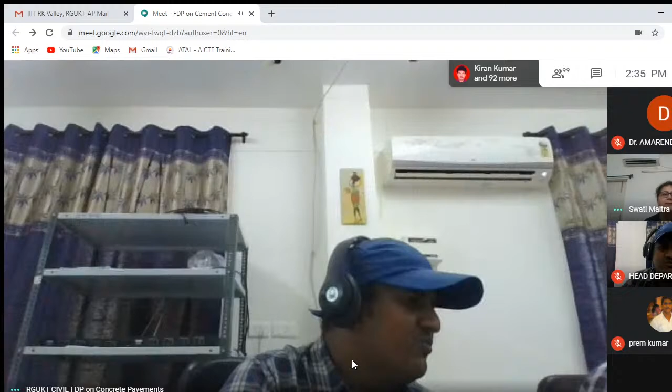Let me introduce Dr. Swati Maitra. She is an assistant professor in Ranbir and Chitragupta School of Infrastructure Design and Management, IIT Kharagpur. She obtained her PhD in civil engineering from IIT Kharagpur and masters from IIT Bombay. She worked in industry for about 8 years. Her research areas include concrete pavement analysis, design, performance evaluation, concrete overlays or white topping, sustainable concrete and cementitious materials, retrofitting, and rehabilitation of civil infrastructure. Dr. Maitra has several research publications in book chapters, international and national journals and conferences. She has received several awards like DAAD Fellowship by the German Academic Exchange Services, Bihar PWD Medal by the Indian Roads Congress, and others. Dr. Maitra is actively involved in a number of research and industrial projects. With that, I request Dr. Maitra to carry forward the session.

Thank you very much. Thank you, everybody. First of all, shall I start, Dr. Amarendra? Yes, madam. Okay. First of all, I would like to thank the organizers, Dr. Amarendra and others, other faculty members who are here for inviting me for this faculty development program of this institute. I am really thankful to them, and it's my pleasure also to interact with them and other participants. So from my behalf, I welcome all the participants for this session. You have come from different institutes, different backgrounds. So after the lecture, just feel free to discuss also. So I will now start my presentation.

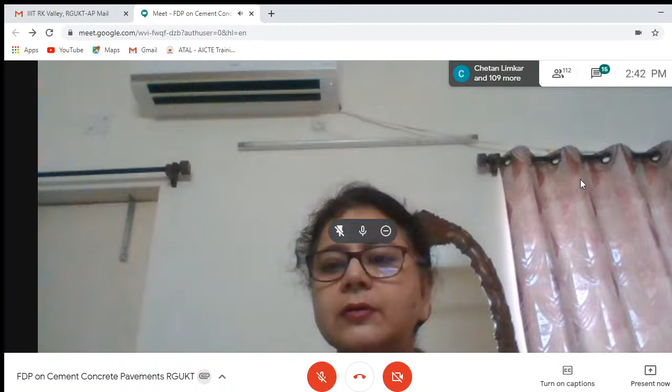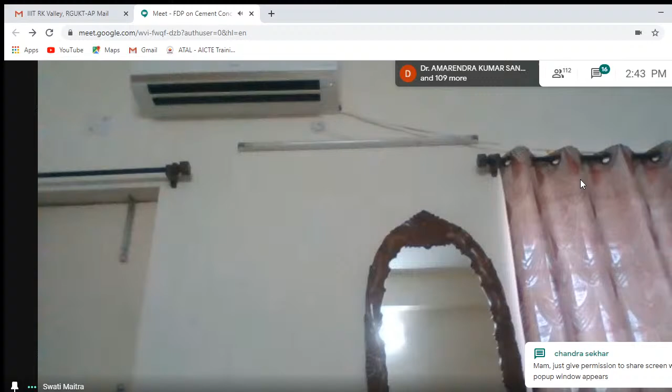It's not showing, I don't... just one more. Just a moment. Just a moment. Present now, your entire screen. Select, okay, share. Share, now off it. Is it coming? Yes, madam. Coming? Yes, madam. Go to the presentation. Okay, slide show, more, go to slides. Okay, so it is visible now? Yes, madam. Fine, okay, fine. Right, okay.

Sorry for the delay. So today's topic is characteristics and design of rigid pavement. Though I will mainly focus on the characteristics of rigid pavement, and this is just an introduction. Road infrastructure: the main component of any road infrastructure is the pavement, and we have bituminous roads and concrete roads. I think this FDP is only on concrete roads, so I'm not going into detail. We can compare construction cost, maintenance cost, durability, and life cycle cost. So in recent years, there is significant emphasis from the government for the construction of concrete roads in India.

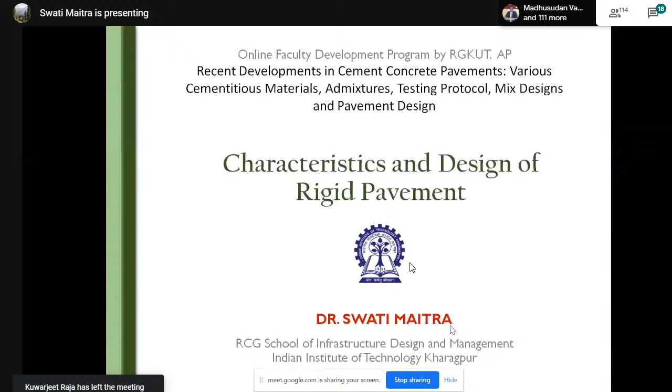In jointed reinforced concrete pavement, it has reinforcement. Continuously reinforced concrete pavement is another type of concrete pavement where we have continuous, a good amount of reinforcement throughout the concrete slab. Pre-stressed and precast is another type of concrete pavement where you can build the concrete slab in a factory and place it on the site. It could be pre-stressed so that it can take more load, and the thickness requirement is also less.

Roller compacted concrete pavement is also another type of concrete pavement. Cell-filled concrete pavement is normally for low volume roads, village roads, like that. Pervious concrete pavement is also another type of pavement, comparatively new. Concrete is generally impervious in nature, but this type of pavement, from the name you can understand, can permit water. So for low volume roads or urban areas, this type of concrete pavement can be used.

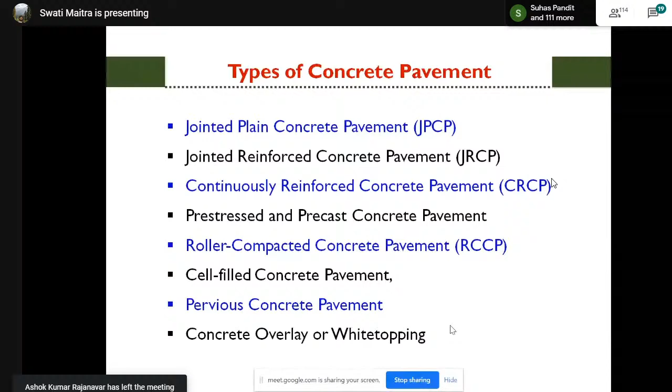And another is the concrete overlay or white topping. This is also coming in a big way nowadays, and this is mainly a rehabilitation measure for existing bituminous roads. So there could be several types of concrete pavement, but the most common type is the jointed plain concrete pavement, and in most of our highways we have this. Our main focus of today's presentation is on jointed plain concrete pavement.

Now let us talk about the characteristics of concrete pavement. Concrete pavement is composed mainly of the concrete slab, and this concrete slab has high flexural strength. Concrete is generally a material which can take up very high compressive strength, and of course its tensile strength and flexural strength are comparatively low, but the strength of the concrete slab governs the concrete pavement design mainly.

So it has concrete slab at the top surface, and below it is the foundation, composed of the base layers, sub-base layers, and the compacted subgrade. In concrete pavement, the influence of subgrade is comparatively less as compared to a bituminous pavement. In case of bituminous pavement, it is actually a layered structure, and all the layers are responsible for taking up the load, so stiffness also decreases as we go downwards.

In case of concrete pavement, also we have different layers. Is that any problem, Dr. Amarendra? No, madam, no, madam, please continue. Okay, you can tell the participants to mute so that there will... Madam, but one or two. Yeah, okay, it's okay, no problem.

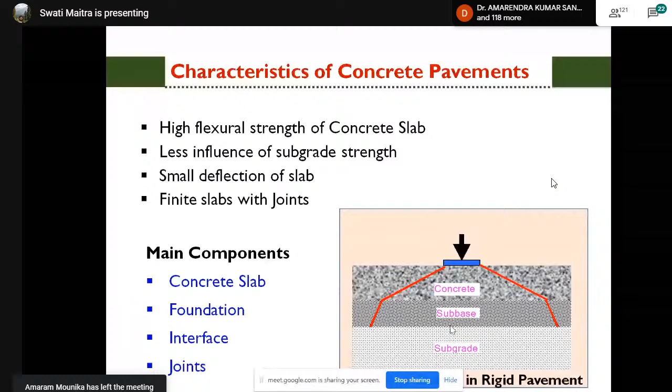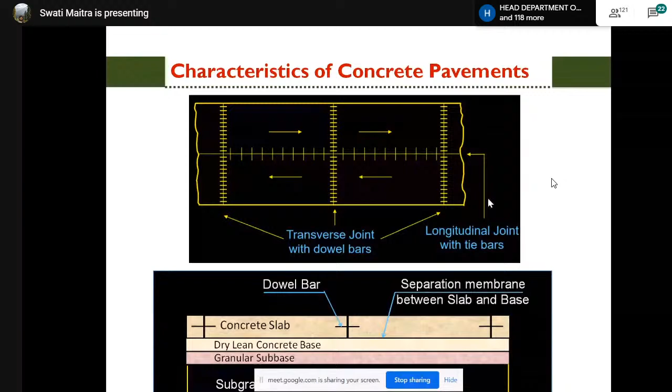This is just a schematic diagram of the concrete pavement. The first picture is the top view, and these lines are the joints, along the transverse direction and along the longitudinal direction. The arrows show the traffic movement. Along the traffic movement you will find these are the joints: transverse joints, provided with dowel bars, and longitudinal joints, provided with tie bars. We will discuss these things. This is just a sectional view of the pavement.

The concrete slab, the dry lean concrete base, the subbase, and the subgrade.

The structural behavior of concrete pavement depends on the traffic characteristics and also on the climatic characteristics. The main load coming on the pavement is due to traffic movement, for all types of pavement. So traffic characteristics is an important consideration for the design of the pavement. This means not only the load, but the tire pressure, the wheel position, the wheel distribution, whether it is single axle or tandem axle, and the tire pressure or total load coming on the pavement. All of this matters in developing the stresses. So the traffic load or axle load is the main load coming on the pavement.

Another important factor is temperature variation. Climatic characteristics mainly arise due to temperature variation and moisture variation. The temperature variation could be daily variation and seasonal variation, each having its own effect on the development of stress on the pavement. Moisture variation is also there, but its effect is much less compared to temperature variation. So often in analysis or design we neglect the effect of moisture, but it has a similar type of effect as temperature.

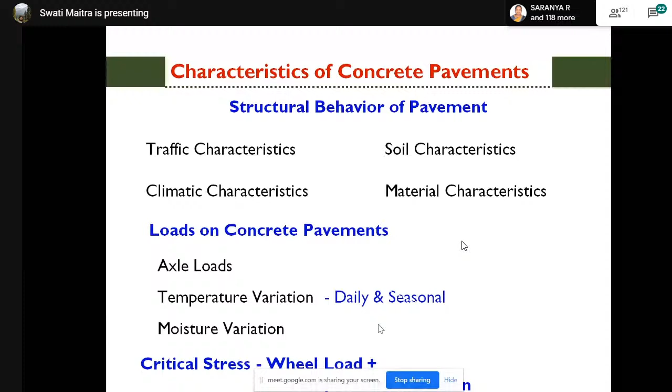Jointed plain concrete pavement: the concrete slab is the main structural component. It is plain cement concrete without any reinforcement, and it is responsible for the load carrying of the pavement. The foundation is a combination of subgrade, base, and subbase, and the foundation is assumed as a Winkler foundation. For all our analysis and calculations, the Winkler foundation model has been assumed, a very simplistic model, as suggested by Westergaard, who is considered the father of concrete pavement analysis, and from that we still use Winkler foundation.

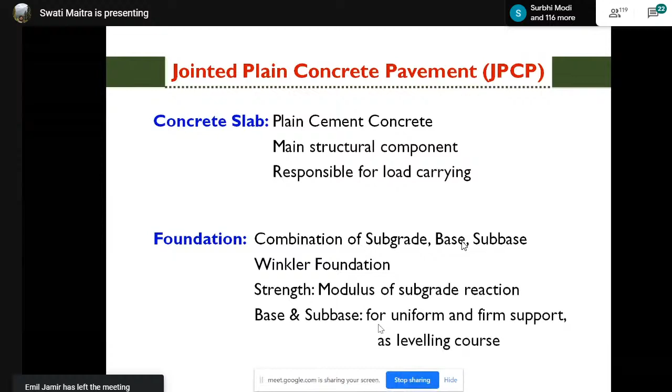Of course, in some analyses, elastic foundation can also be used, but Winkler foundation model is still quite popular. In Winkler foundation, the subgrade strength is expressed by one single parameter called the modulus of subgrade reaction, and this parameter can be found from a plate load test, or it can be correlated from the CBR value. Base and subbase, as I said, provide uniform and firm support for the concrete slab.

Now the interface, as I said, could be a bonded interface or an unbonded interface. A bonded interface means when the concrete slab at the top is cast directly over the base or subbase, then we call it a bonded interface.

The interface between these two layers is very rough, and the friction between them is very high. This is because the lower layer is, in most cases, dry lean concrete, and even if it is WMM, the friction is still quite high when the concrete slab is cast directly over the base.

In case of an unbonded interface, there is a bond breaker between the concrete slab and the dry lean concrete base. This bond breaker could be a thin asphalt layer, a polythene sheet, or some other polymer material. Generally in India, we use a very fine 125 micron polythene sheet as a bond breaker.

This interface can also be called a smooth interface. The bonded interface can be termed a rough interface, whereas the unbonded interface can be termed a smooth interface because it has very low friction.

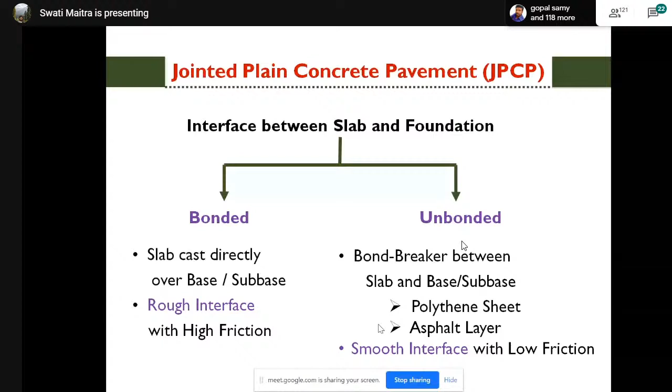Now, joints are an integral part of the pavement, as I said. Earlier, sir also discussed the different types of joints and why they are provided. We will discuss this a little bit here as well.

In JPCP, we have four types of joints: contraction, construction, expansion, and isolation joints. These joints are provided to control cracking due to shrinkage, thermal contraction, or moisture and thermal variation within the slab. Joints are provided in both the transverse and longitudinal directions of the pavement.

Concrete is a material whose main ingredients are cement, aggregate, sand, and water. When water is added to the dry mix, hydration of the cement takes place. This cement hydration is an exothermic reaction, so a lot of heat is generated.

If we cannot control this heat, there will be loss of water through evaporation, and because of that, hydration cannot take place properly. If we control this evaporation of water, hydration can take place in a proper way, or sometimes we put additional water so that it gets sufficient water to hydrate. That is why curing is necessary in all concrete structures.

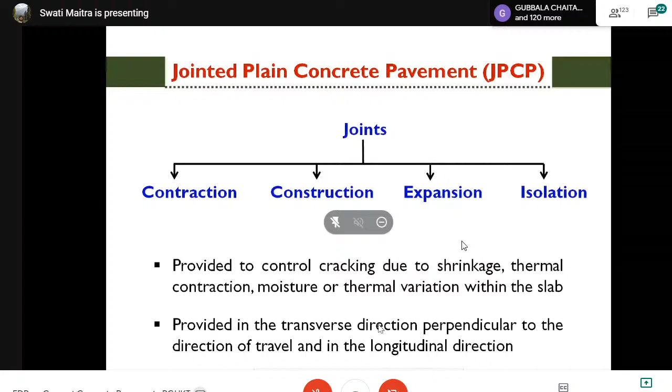So we have contraction joints, which allow cracks due to thermal contraction. We also have construction joints, to separate successive construction activities. These construction joints occur, for example, when we are constructing the pavement and after some time have to stop the work.

Say a day's work is over, so we have to stop it. There we need to provide a full depth construction joint. So that is necessary, and we have to provide dowel bars there.

Construction joints are provided to separate the successive construction activities, and expansion joints are provided to permit the thermal expansion of the slab without damaging the adjacent slabs or structure. Expansion joints are not provided in India in concrete pavement, but they are provided near the structures.

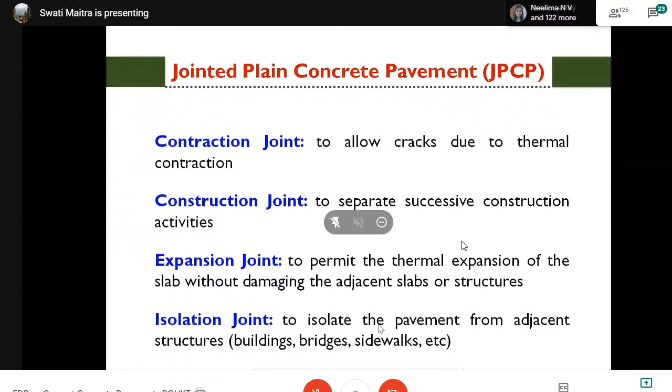So that needs to be provided. Isolation joints or expansion joints are provided only adjacent to the structures, but contraction joints and construction joints have to be provided. These expansion or isolation joints need to be provided when there is an adjacent structure, so you have to provide these two types of joints.

I think similar pictures sir has also shown in the morning, but this is just a schematic diagram. So I'm again showing quickly.

This is what we do here. This is the undoweled slab. We are saw cutting it at 1/3 to 1/4 of its depth, so that the crack occurs below that saw cut. Since those are the weakest locations, we provide dowel bars at that location. So that is the contraction joint in pavement.

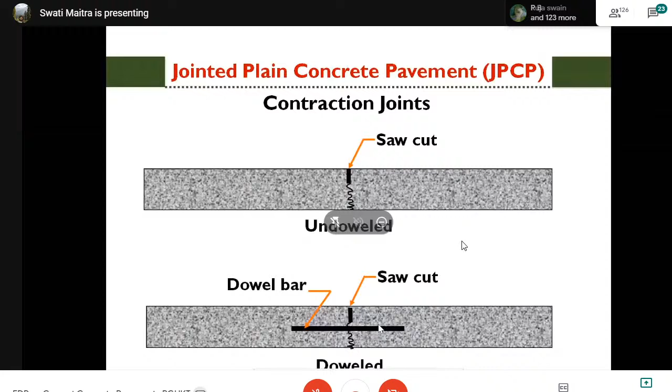In case of longitudinal joint, similar thing. Here also we cut it along the length of the pavement, same 1/3 to 1/4 of the slab depth, and we provide tie bars.

Of course, the diameter of the tie bars are much less as compared to dowel bars, because the function of the two bars are different. Dowel bars are provided to transfer the load from one slab to the other slab. However, the function of the tie bar is not that. Tie bars are provided to hold the two slabs in their positions, not for load transferring.

Tie bars are provided. So here you can see the schematic diagram of the tie bar at the longitudinal joint of the pavement.

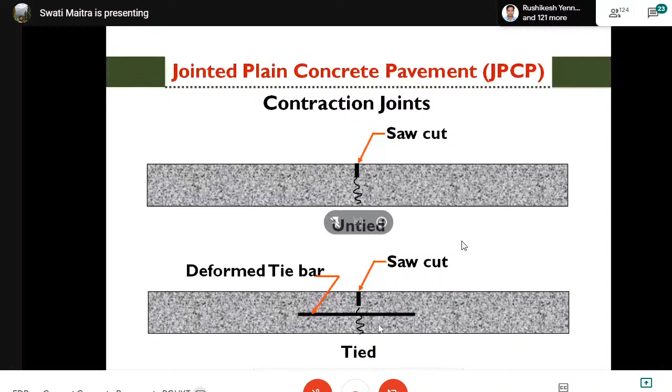Here, after the pavement is constructed, the grooves are cut, and this has to be cut within 18 to 24 hours of the pavement. Otherwise, again, shrinkage cracks may occur. So this is also a very important thing, that we have to cut the grooves with proper depth and also within a stipulated time, that means within 24 hours.

In many cases it has been found that because of the late saw cutting, cracks have occurred on the pavement, and there are other distresses followed by that. We have seen also in NH 60 that after the groove cutting, when we open that side of the pavement, or removed the shoulder portion, cracks have been found below the saw cut. So this is good.

Otherwise, cracks may occur at any other location. We want the cracks to occur only at the saw cut locations. So this is the contraction joint created below the saw cut of the pavement.

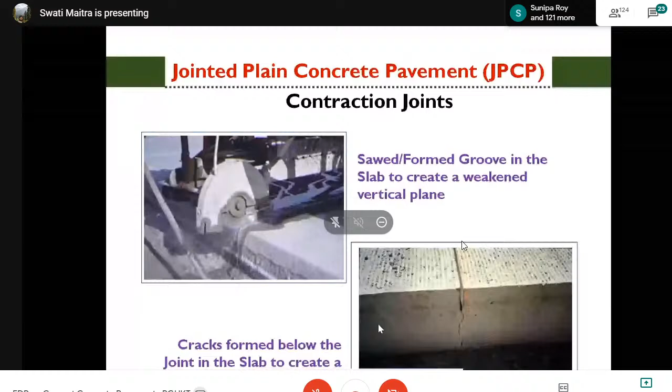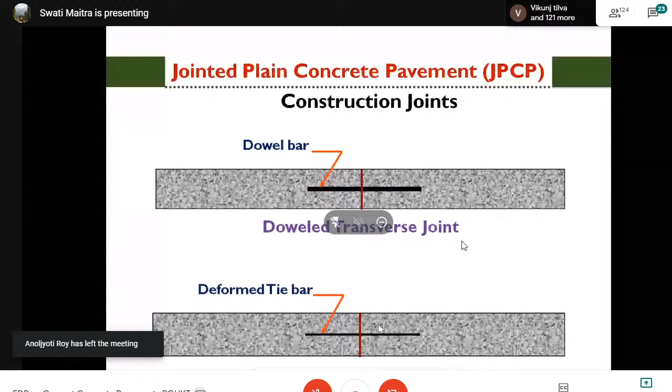For longitudinal case, we need to provide tie bars as well in the construction joint. Longitudinal construction joint, tie bars will be provided to hold the slabs in their position.

Generally, dowel bars are of the range of 32 to 36 millimeter diameter, and the diameter of tie bar is 12 millimeter, 16 millimeter, like that. So there is a lot of difference in their diameter based on their purpose. Dowel bars are for load transfer, while tie bars are just to hold the slabs.

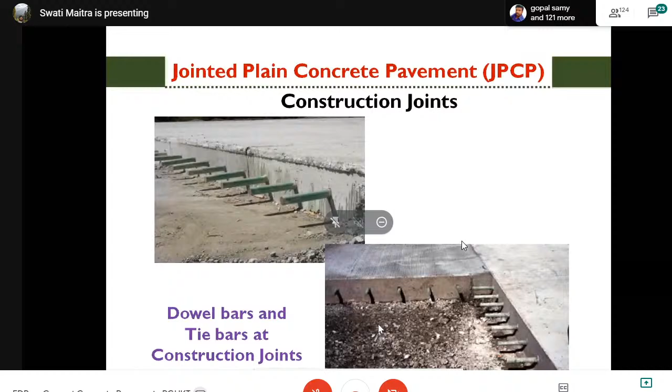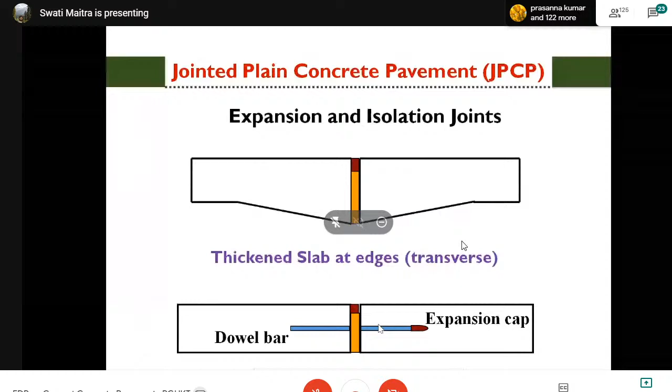Now, as I said, load transfer is a very important component in jointed plain concrete pavement, because it is not a continuous structure. The slabs are formed because of these joints in the transverse and longitudinal directions. So load has to transfer from one slab to the other, and how well the load is transferred actually governs the performance of the pavement. It is very important that the load applied on the slab is shared by the adjacent slab, and this gives the performance of the pavement.

If the load transfer is poor, then a lot of distresses may happen: faulting type of distress, pumping, erosion, corner breaks. I will show you some pictures of several distresses that occur if the joint is not properly constructed, or not properly sealed, or the load transfer is not proper. There could be many reasons for distresses, so I'm not covering those, but I will show some pictures of how joint-related distresses occur in JPCP.

And the performance of the pavement is expressed by a factor or parameter called load transfer efficiency. The load transfer efficiency is the ability of the pavement slab to transfer the load from one slab to its adjacent slab. This load transfer is done mainly by two mechanisms: one is the dowel bar system, another is the aggregate interlocking system. In some cases, it is a combination of the two.

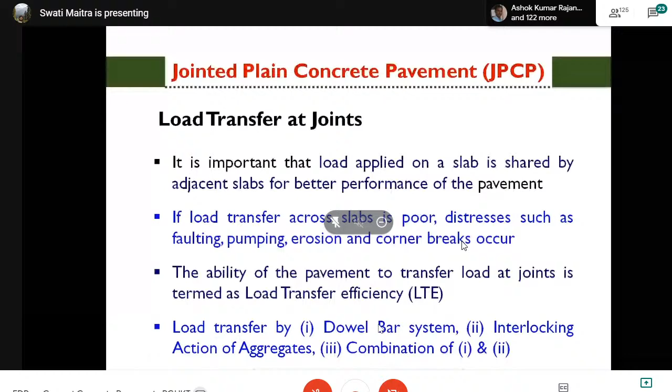Now, load transfer is very important to transfer the applied load from one panel to the other panel. This load transfer is expressed in percentage and can be measured by measuring the deflection of the loaded slab and the deflection of the unloaded slab. So the load transfer efficiency is actually the ratio of the deflection of the unloaded slab to the deflection of the loaded slab, expressed in percentage.

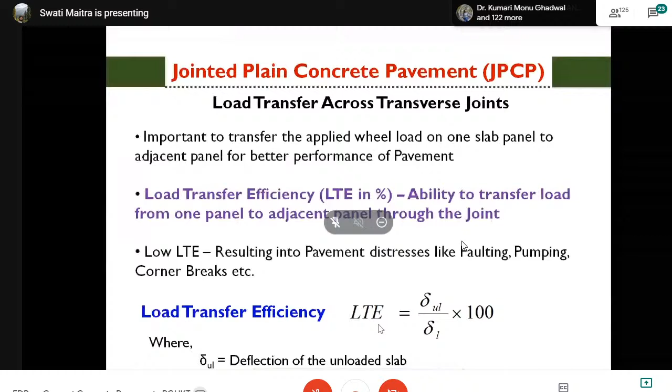So from this expression, you can understand that if the unloaded slab deflects equally with the loaded slab, then the load transfer efficiency is 100%, which is the ideal case. But it is an ideal, theoretical case, it cannot happen. When the unloaded slab deflects very near to the loaded slab, the load transfer efficiency becomes high. So it is the purpose of the designer or construction people that the load transfer efficiency should be very high, because that governs the performance of the pavement.

And then this was repaired, retrofitted, strengthened, and this you cannot see now because it was completely replaced. This happened, of course, due to improper settlement of foundation, possibly, and maybe some other distresses. So there will be a lot of gaps and difference in levels also in the two portions of this.

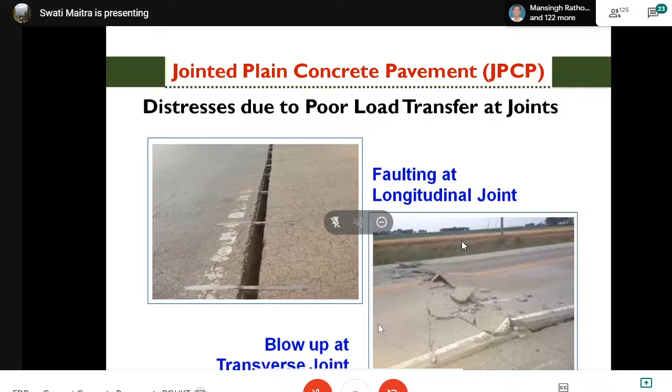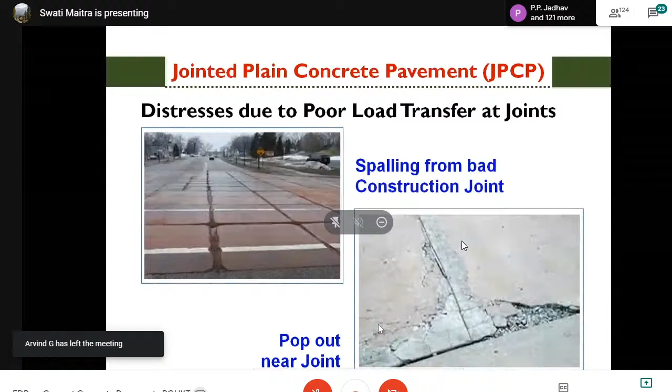So these are all joint related distresses that occur in jointed plain concrete pavement if the joints are not properly constructed, treated and maintained. Joints, particularly in JPCP, need to be sealed so that water and other materials and dust particles should not go inside and damage the underlying layers. If that happens, it may damage the subgrade, cause erosion, cause voids below the slab, or damage the base and sub-base layers.

So it is very important to maintain the joints, and often joints are found to be the main distress areas in JPCP if not properly constructed or maintained. Proper sealant needs to be provided just after construction, both in the transverse joint as well as in the longitudinal joint. So proper sealants need to be provided in JPCP joints.

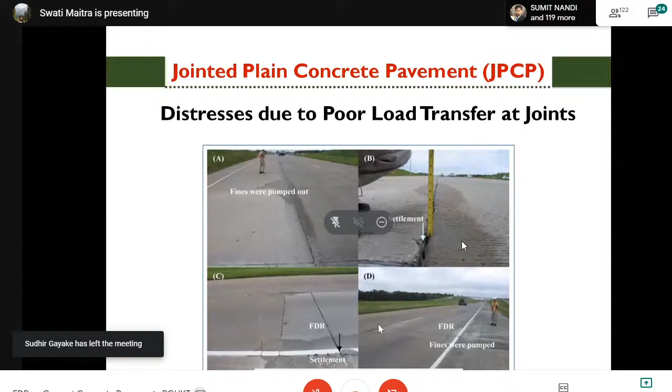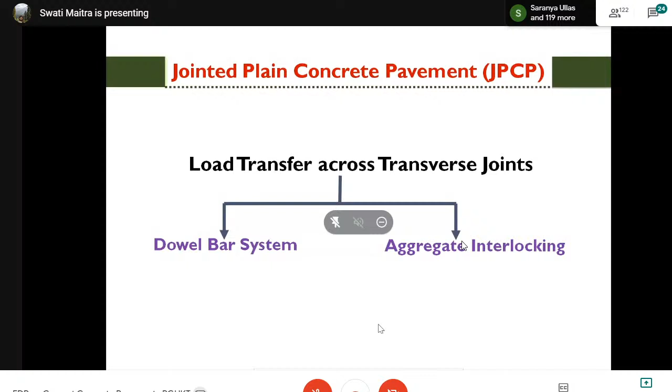Now we will discuss the load transfer mechanism. Load transfer across transverse joints, as I mentioned, is due to the dowel bar system and aggregate interlocking system, or it could be a combination of the two.

In case of the dowel bar system, dowel bars are mild steel bars provided mainly for load transfer from one panel to the adjacent panel. It connects the two panels at the mid depth of the slab. Dowel bars have to be provided when the pavement is subjected to high traffic volume, and comparatively the joint spacing is longer. So for all those cases, dowel bars have to be provided in the joint.

Dowel bars allow the adjacent slab to expand or contract also, because those joints are provided for that purpose. One side of the dowel bar is actually provided with some grease or plastic cover, so that it can take care of the expansion.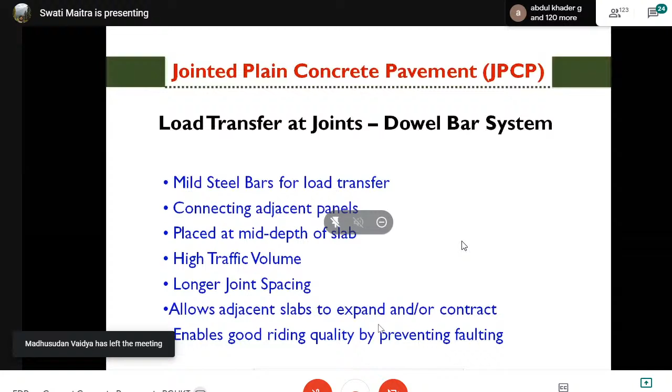So it allows the adjacent slab to expand or contract, and it provides good riding quality by preventing faulting. If dowel bars are not provided, then only the slab which is loaded will deflect, the other one will not, so a user will experience a jar on movement. So when dowel bars are functioning properly, they enable good riding quality to the users.

That means no dowel bar is there, so the slab which is subjected to load will only deflect, the other one will not. So as a road user, when the vehicle moves, it will experience a jar, and that is not comfortable for the road users. Also, it will damage the loaded slab at the edge.

So this type of thing we want to avoid. For that, dowel bars are provided, and you can see that when dowel bars are provided, both the slabs bend. Of course the ideal condition is both slabs bend equally, but this is theoretical only, though as close as possible.

When the dowel bars are functioning properly, both slabs deflect almost equally, so it is a smooth variation from the loaded slab to the unloaded slab. So dowel bars also bend the unloaded slab, and this helps in transferring the load. That means the loaded slab also deflects, the unloaded slab also deflects, and the load is transferred from the loaded slab to the unloaded slab. So this is the function of the dowel bar.

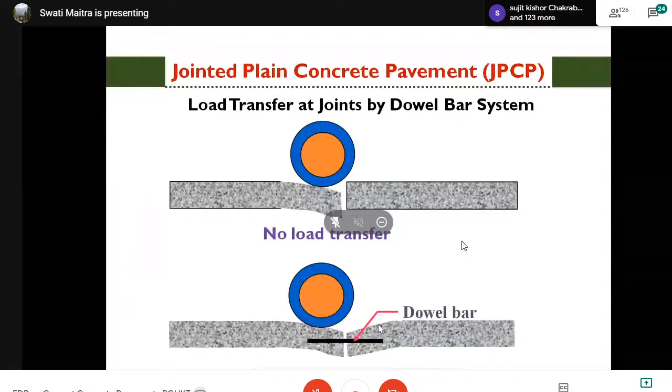So it provides load transfer from one panel to its adjacent panel. Now, on what factors does the performance of the dowel joint depend? The dowel joint parameters depend on these factors.

That means the diameter of the dowel, the embedded length of the dowel. Some portion of the dowel, the half portion is on the left-sided slab, another half on the right-sided slab, so the total embedded length matters for the performance of the dowel. The spacing of the dowel also matters, because the dowel is actually taking up the load, and dowels are placed at a regular interval across the transverse joint. So spacing of the dowel, diameter of the dowel, embedded length of the dowel are important parameters for load transfer.

Another parameter is modulus of dowel support. I will tell a little later, next slide I think, next slide. Yes, modulus of dowel support and dowel looseness also I will discuss in detail.

Those are important parameters. Joint opening also matters, in case of dowel joint opening. It may not be very significant, but still that matters. And of course, the properties of the material, that is properties of steel. The dowel bars are made of steel. Properties of concrete, which is the slab, and the strength of subgrade. So all these parameters actually influence the load transfer from one panel to the other panel. So when we go for design or analysis, all these things are responsible, and the load transfer efficiency depends on all these parameters.

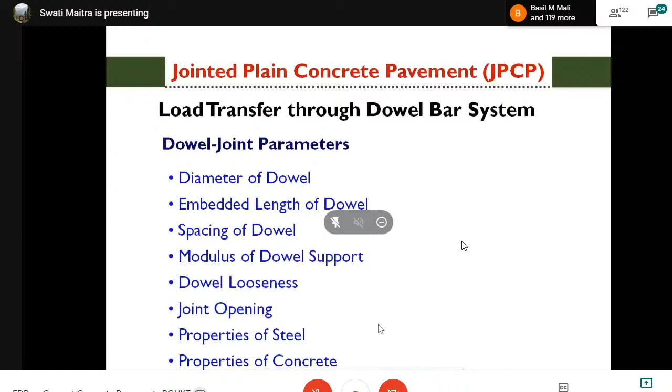Now, what is modulus of dowel support? It is an interaction between dowel and concrete. It's a hypothetical term, but it represents the interaction between dowel and the concrete. The dowel bars are embedded into the concrete, so the interaction between the two is very important. That is represented by this parameter, modulus of dowel support. A high modulus value indicates a very good contact between the surrounding concrete and steel. So when the modulus value increases, load transfer efficiency also increases.

So for our analysis purpose, we have the K value ranging from 80 to 600. That can be determined also from experiment. So this is called modulus of dowel support.

Relative stiffness of dowel embedded into concrete is also another parameter, which is expressed by a term beta. Beta is a parameter called relative stiffness of dowel, and all these parameters represent the load transfer due to dowel bar system. Beta depends on the modulus of dowel support, B is the diameter of the dowel, I is the moment of inertia of the dowel bar, and E is the elastic modulus of the dowel bar. So this is the relative stiffness of the dowel.

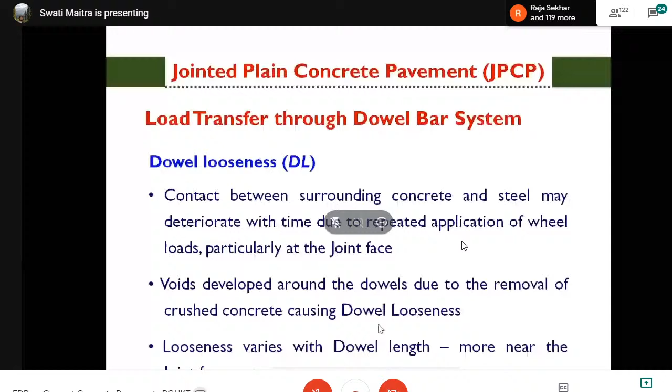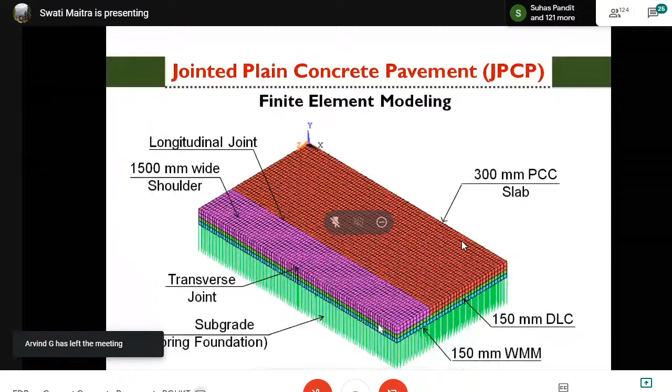Then I analyzed and found out the stresses, load transfer, and all those things. In the finite element modeling, the main components of the JPCP are the concrete slab and the foundation, which is composed of the base and granular subbase, while the subgrade is the Winkler foundation. So the subgrade was modeled as Winkler foundation, and base and subbase were modeled as elastic material using solid brick elements, and the concrete slab was also modeled as a solid brick element with linear elastic, isotropic properties.

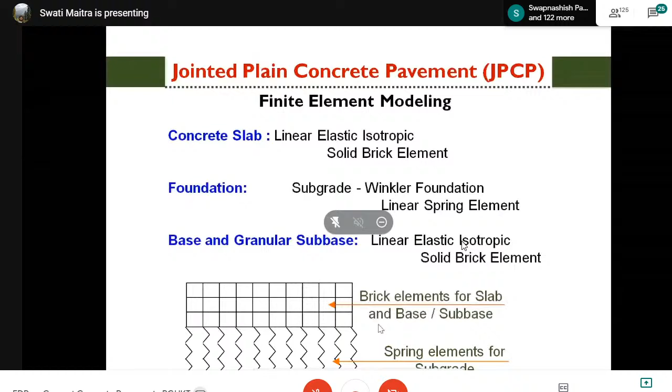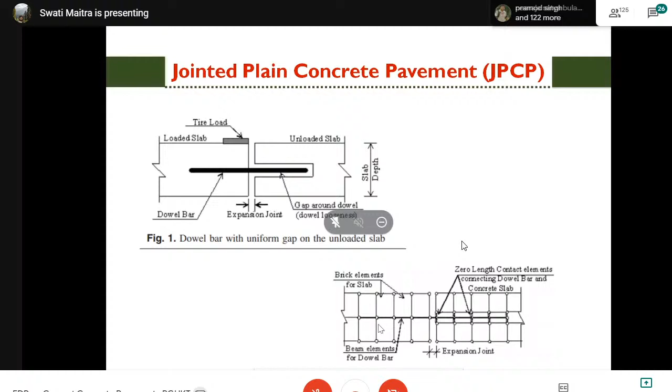I have done a lot of parametric studies, and from that an expression was developed for load transfer efficiency. It was found that load transfer efficiency depends on all those parameters listed in the earlier slides, which govern the load transfer efficiency.

DL is the dowel looseness, S is the spacing of the dowel, and L is the radius of relative stiffness, which takes care of the pavement, the modulus of subgrade reaction, and the elastic properties of the slab thickness. Beta is already defined here, and S is the spacing. So load transfer efficiency depends on all these parameters.

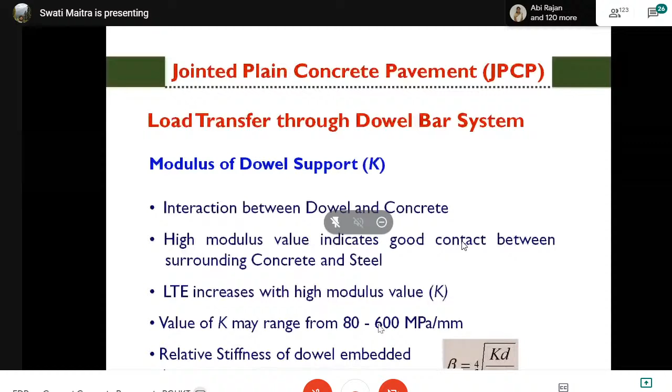That means beta also depends on this K value. You can see here the modulus of dowel support, the diameter, the elastic properties of the steel, and the moment of inertia, that is the area or cross section. So it depends on the dowel parameters, the radius of relative stiffness which takes care of the pavement geometry and subgrade strength, and the dowel looseness. All these parameters influence the load transfer efficiency of the dowel joint.

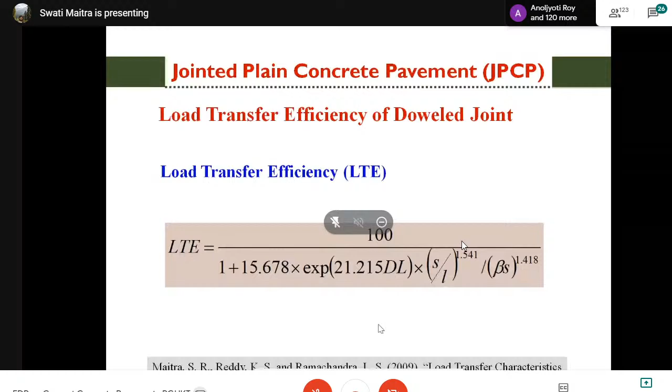There are a lot of other things, but let us go to the load transfer at joints due to aggregate interlocking. Aggregate interlocking joints are provided when the traffic volume is relatively less, and the joint spacing is also relatively less as compared to high volume concrete roads. So when the traffic volume is less, we can avoid the dowel bars and the load transfer can be done through aggregate interlocking.

In this aggregate interlocking mechanism, the load is transferred due to the interlocking action of the aggregate particles. As shown in the earlier slides, we cut the slab at 1/3 location or 1/3 depth, and below that cracks are formed.

So those cracks actually help in transferring the loads that form the aggregate interlock joint. Because of that, the load is transferred from one panel to another due to the interlocking action of the aggregates. So these cracks are joints with irregular faces.

In many cases, particularly at longitudinal joints, we provide tie bars not for transferring the load, but to ensure that the cracks remain tight so aggregate interlocking and load transfer can occur through that interlocking action.

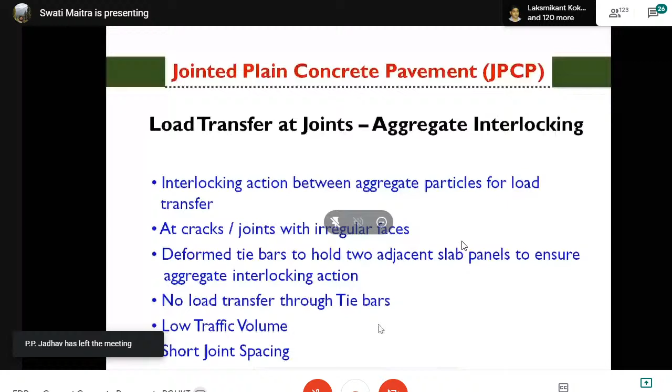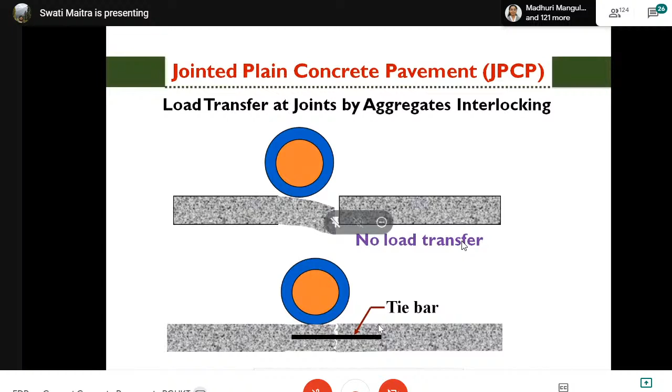But if there is an irregular, rough face, then there will be load transfer through aggregate interlocking. Here too, tie bars are provided to help the interlocking action, not for load transfer, but for tying the two slabs in position so that load transfer can take place through interlocking.

Now the parameters responsible for aggregate interlocking load transfer are many: joint opening, size and angularity of the aggregates, and strength of aggregate, since it is through aggregate only. So aggregate properties are very important, particularly size. If it is very smooth, round aggregate, the load transfer will be less. So size and angularity of the aggregates matter.

Strength of aggregate also matters; a very soft aggregate will not provide good load transfer. Joint opening is the most critical parameter—if the joint opening becomes larger, load transfer will drastically reduce. And distribution of aggregate within the cement paste also matters, since it is aggregate interlocking, so all aggregate properties are responsible.

Thickness of the concrete slab is also important for aggregate interlocking. If the slab is very thin, it will not get sufficient area at the surface for load transfer, so thickness matters too. The nature of the fractured surface also matters—a smooth interface will not provide good aggregate interlocking load transfer, so roughness of the surface matters a lot.

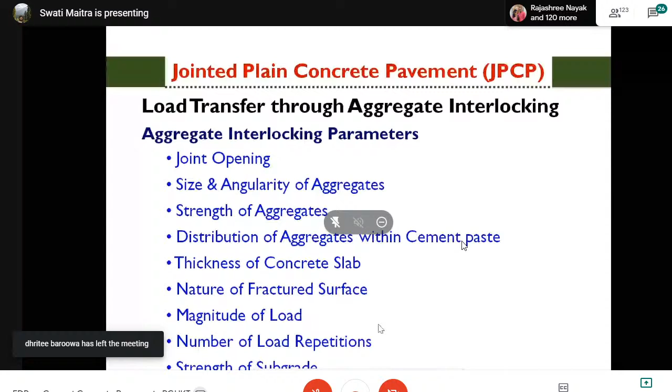It also depends on the load and the strength of the subgrade. So these are the parameters: aggregate related parameters like maximum size, angularity, strength of aggregates, and joint opening or crack width, all very important for the aggregate interlocking load transfer mechanism, along with roughness and other factors.

So the mechanism is: the irregular faces of the crack or joint come in contact, and the interlocking action of aggregate particles helps in transferring the load from one side to the other. The load is transferred by shear spring action, and this is also represented in the finite element representation.

Aggregate interlocking can also be represented by a spring action, as if there are many springs at the edge. So it can be represented as a series of springs, like in the modulus of subgrade reaction. Here too, you can resemble it as a series of springs.

The spring stiffness depends on the nature of the cracked surface—how rough it is—and on slab thickness, because you need the bearing area. The nature of the cracked surface depends on the maximum aggregate size, the crack width, the roughness, and the time of crack formation.

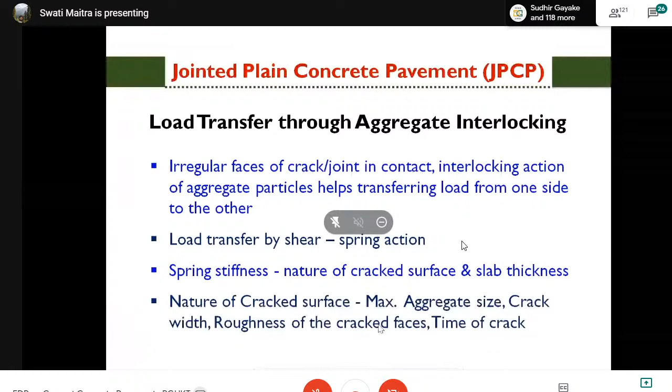If the crack is formed at a very late stage, the crack width will be more, with other implications. So the nature of the cracked surface is also important for the aggregate interlocking load transfer mechanism. Here is the finite element representation which I did during my PhD work—the series of springs represents the aggregate interlocking load transfer mechanism, where load is transferred from the loaded slab to the unloaded slab.

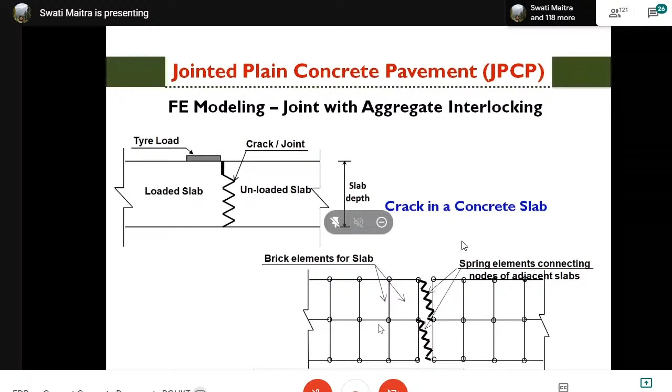These springs, spring action, this aggregate interlocking - actually it is the spring action due to which this load is transferred to the adjacent slab.

With modeling and a lot of other analysis, I have developed a new parameter, modulus of interlocking joint, to represent the strength of the fractured surface. This parameter is a function of the crack width and the maximum aggregate size, which are the two most important parameters for the aggregate interlocking load transfer mechanism. The strength of the fractured surface depends on these two parameters, and based on that, an expression was introduced for modulus of interlocking joint, similar to modulus of subgrade reaction.

In this parameter, X is the crack width and IR is the interlocking ratio, which I have introduced. This is the maximum aggregate size divided by the crack width. So this is the expression for that.

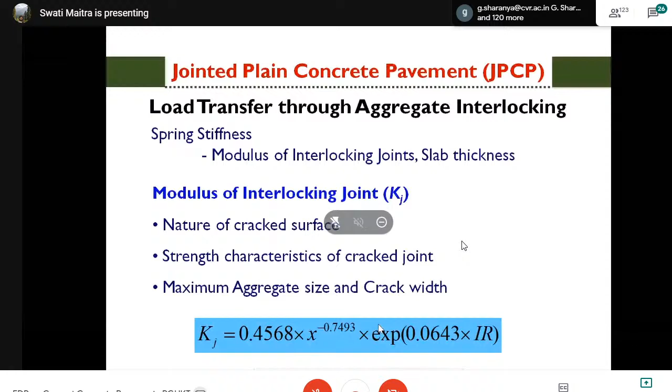Now this aggregate interlocking - since there is no additional dowel bar or any other mechanism, this load transfer efficiency over a period of time may reduce. Even in a dowel bar system it may reduce due to dowel looseness and other factors. So here also, aggregate interlocking load transfer mechanism efficiency may reduce over time.

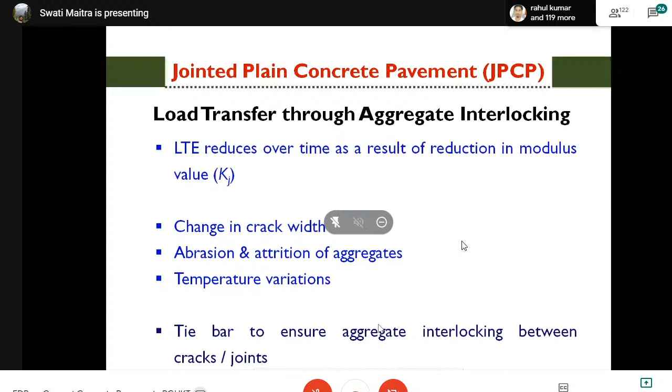What are the factors for that? Change in crack width - initially the crack width is very small, so load transfer is very good, but over a period of time the crack width may increase, so load transfer efficiency may reduce. Abrasion and attrition of aggregates, temperature variation - all these factors may be responsible for reducing load transfer efficiency of the joint.

So let us discuss about the effect of temperature on concrete pavement.

This is all about, for the moment, dowel bar system and aggregate interlocking, but there are many more things - many studies have been done by us - and I will just give a very quick overview of the mechanism of the dowel bar system and aggregate interlocking system load transfer mechanism.

Now I will go to the effect of interface in jointed plain concrete pavement, which is also a very important component, particularly to take care of the temperature effect. Temperature effect is twofold in case of JPCP: one is the daily variation of temperature, another is the seasonal variation of temperature.

In daily variation, particularly in daytime or nighttime, this effect is seen. In daytime, the top temperature is more as compared to the bottom temperature, so there is a tendency of the slab to curl downward - meaning the middle portion goes up and the sides are at the lower level.

While in nighttime, when the top temperature is less as compared to the bottom temperature, the slab is curled upwards - the sides go up, whereas the middle portion is at the bottom. So this is the curling effect.

If there is no restraint, this type of thing may happen. But in practice, do we see this? No, we do not, because these curling effects are actually restrained due to many factors - one is the foundation, the adjacent slabs, the dowel bars, and the self-weight of the slab. All these things are restraining factors for this curling.

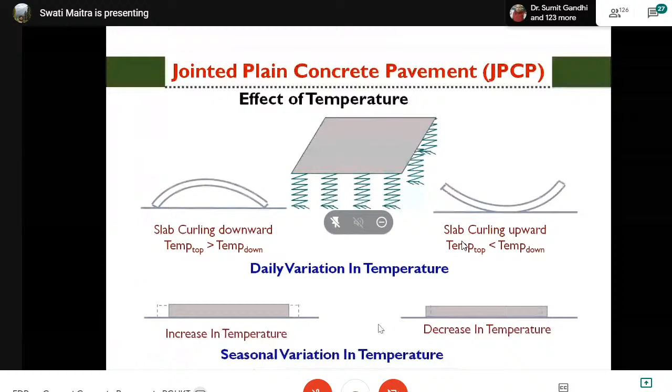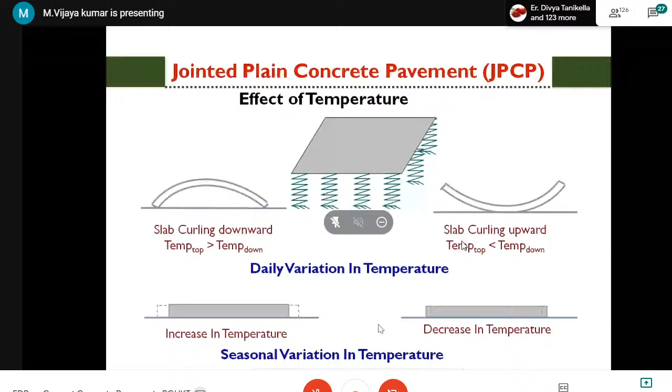Another effect is the seasonal variation of temperature. In summertime, due to increase in temperature, the slab tends to expand, and that is why contraction joints or expansion joints are provided to take care of these things. While in wintertime, there is a decrease in temperature, so there is a tendency of the slab to contract. The joints are provided to take care of these thermal effects - this is the seasonal variation of temperature effect on the concrete slab.

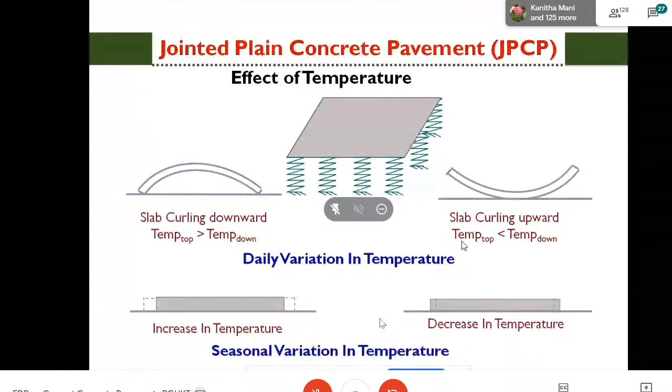When the slab is cast directly over the base, it is a bonded interface, and the friction between the two layers is very high. In case of an unbonded interface, there is a bond breaker, and the friction between the two layers is reduced. So actually this is to take care of the temperature effect. I will tell all this a little later also.

Now, we have also done finite element modeling of the interface behavior, and the interface was modeled with contact elements between the concrete slab and the base. When there is tension, there is loss of contact, which means it can take up that curling effect when there is loss of contact. But when there is high tension, the slab tends to curl up or down, so these contact elements will represent the loss of contact when there is tension.

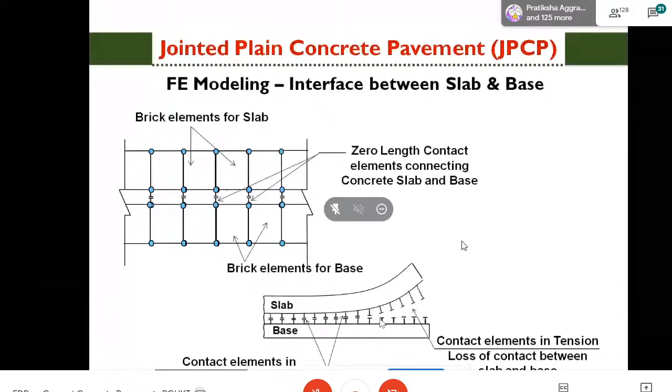Normally in compression there is contact in between, but when there is tension, there is a loss of contact. So this takes care of the curling effect. With this, the interface was modeled, and also we did one laboratory experiment to understand the friction characteristics between the slab and the base.

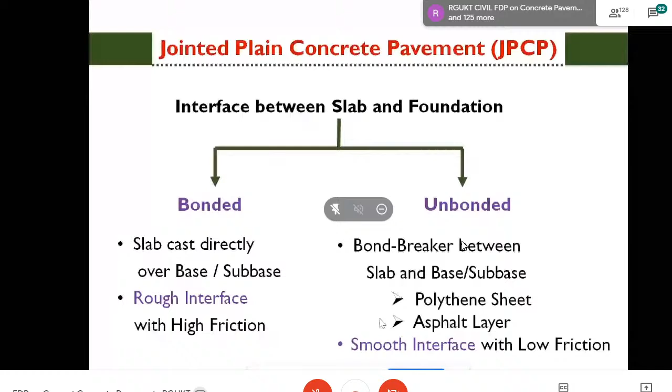As I said, the bonded and unbonded interface — this was about how much friction is developed between the layers. For that, we have done the experiment. Sir has shown one picture of that already and said I will detail it more, so that's what I will do.

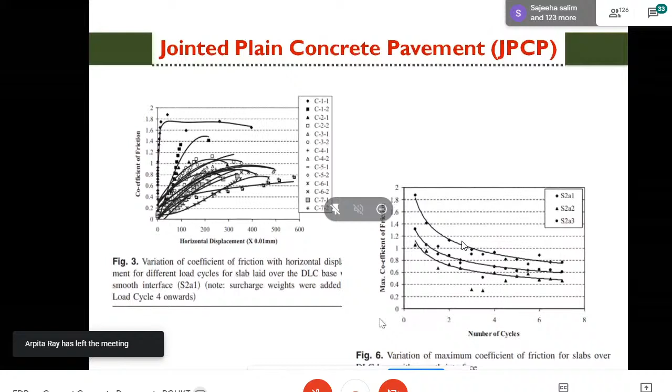You can, if you are interested, go through my ASCE paper also on that. So from that experiment, we have obtained the coefficient of friction for bonded interface and unbonded interface condition, for both WMM as well as DLC.

What we found is that in DLC, the rough interface was so high that we could not move the slab at all. So the friction value was more than 20 — it was not possible to move because it was almost like a monolithic thing. So for rough interface, it was more than 20.

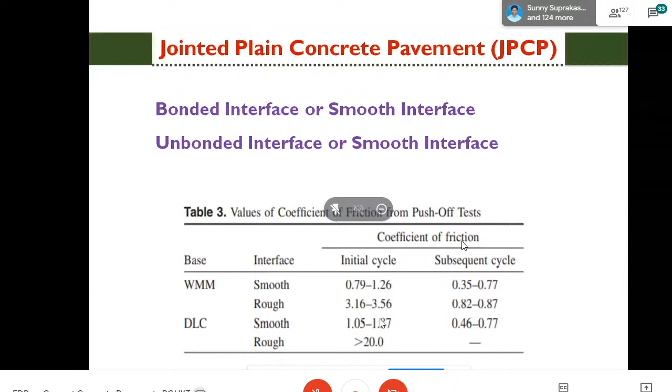But for WMM, we had some value in the initial cycle as well as for subsequent cycles. And for smooth interface also, we have obtained some value, as you can see from this table. So this is all from our experiment done here for bonded interface and unbonded interface.

Now we have done some analysis also, with different positions of the load and different temperature conditions, meaning seasonal variation, positive and negative — winter season, summer season, as well as daytime and nighttime — and with different load positions. We have done finite element analysis with this bonded and unbonded interface condition, and nonlinear temperature variation was considered.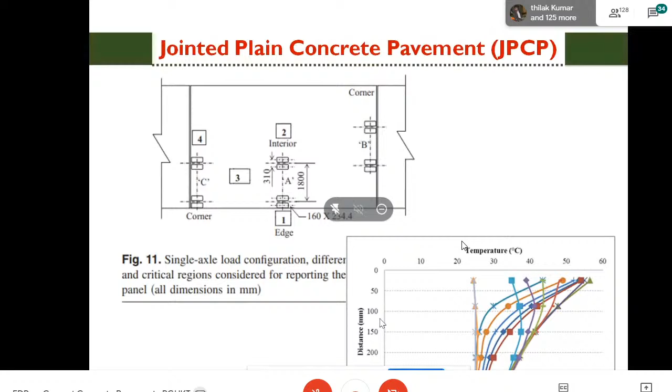So here also we have obtained for so many cases, and for rough and smooth interface conditions we found that stresses are developed, and stresses are less in case of rough interface condition when it is only wheel load cases, because in that case the DLC is also contributing in taking up the load, so the stress development is also less at the bottom of the concrete slab. So in that way, the bonded interface is beneficial because the thickness requirement is less.

But if you see from this chart, the stresses due to temperature effect, then for bonded interface it is actually more. So in that case, to take up the temperature effect, the temperature stresses, the smooth interface is beneficial. So both have their benefits and limitations.

But for our country, we have obtained, or we have selected smooth interface for all our JPCP construction, because the temperature variation is significant here, both in summertime and wintertime, it's significant variation. So to take care of that effect, smooth interface has been taken up in the IRC.

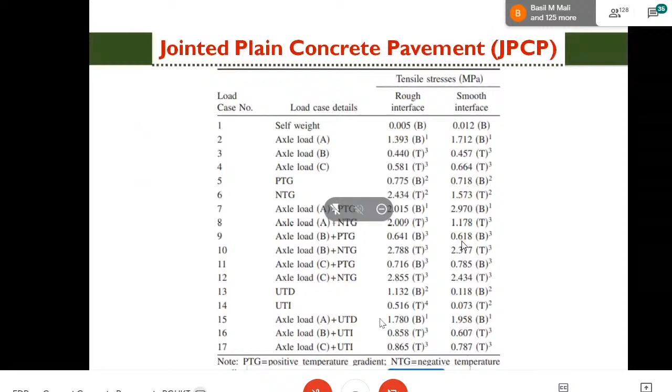So this is a few things about jointed plain concrete pavement. Another one, I will very quickly tell in a few slides, only 2-3 slides, on white topping.

In recent years, jointed plain concrete pavement is constructed in many places, particularly in highways. It is a very good option. But in urban roads where the traffic volume is not so high, or semi-urban areas, or other places, white topping is also another type of pavement which is coming up, and this is also good for relatively less traffic volume roads.

So white topping is a concrete overlay over a distressed bituminous pavement. It is actually a rehabilitation measure of an existing bituminous pavement, it is the concrete overlay. So the below layer has to be a bituminous layer, and that is why it is called white topping - over a black top, it is the white topping. This concrete is more or less whitish in color.

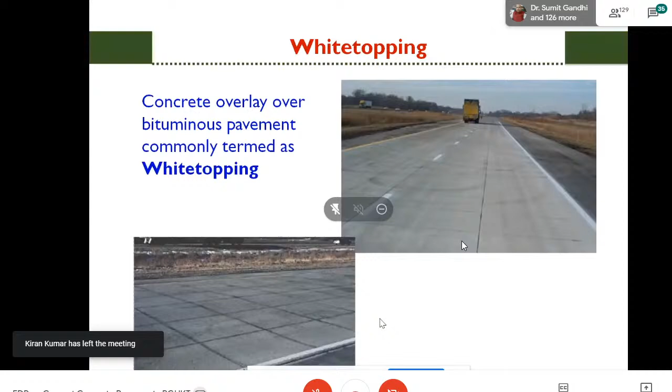So white topping is another thing, and I think more details will be discussed also in this course by Dr. Ramachandra. But I will just share a few words.

So in white topping, compared to JPCP, we have lesser spacing of joints, 1 meter to 1.5 meter in either direction. It could be square or it could be rectangular. Thickness is also less - normally in JPCP we have 250 mm onwards thickness, maybe 250 to 350 or 400 mm also is possible, depending on the traffic. But in case of white topping, the thickness is much less, 100 to 200 mm.

And for that, we have to have a minimum thickness of bituminous layer, because here the existing bituminous layer acts as the base layer - instead of the DLC, it is the bituminous layer that acts as the base. So a minimum 75 millimeter or so, or 100 mm bituminous surfacing is necessary for the construction of white topping.

And subgrade value - this is from the code only, I have taken the subgrade value here. It is recommended that it be more than 15 kg per centimeter square per centimeter. And the same concrete grade, M40 grade of concrete, as used in JPCP, is used here also in white topping. And concrete in JPCP is normally plain concrete.

But here it is plain concrete also is possible, but it may also be fiber reinforced. Very fine fibers may be used, or high strength concrete also may be used.

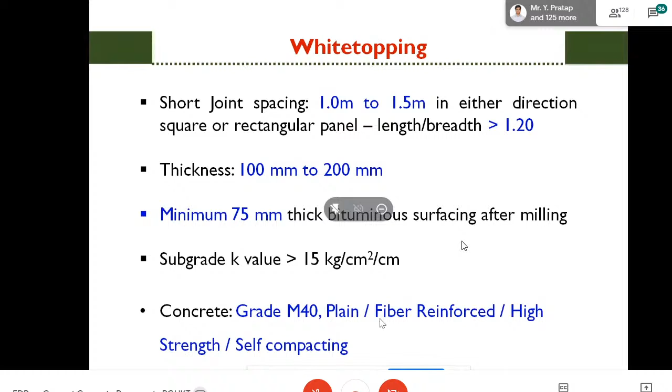Self-compacting concrete can also be used, and these are new things coming up. Fibers could be steel fiber, polypropylene fiber which is very thin and long, or microfibers can be used in very small quantity, 0.2 to 0.3%, not more than that.

The interface should be bonded, unbonded, or partially bonded, but it should ensure that the existing bituminous surface is rough so there is proper bonding, because the thickness is less compared to JPCP. That is why a bonded interface is preferred.

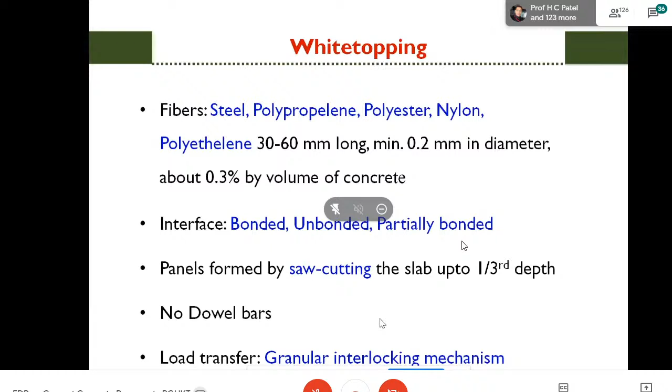Panels are cut by saw cutting up to one-third depth as in JPCP, but here the joint width is also less. One important thing is that it doesn't have any dowel bar, so all load transfer is due to the interlocking action of the aggregates.

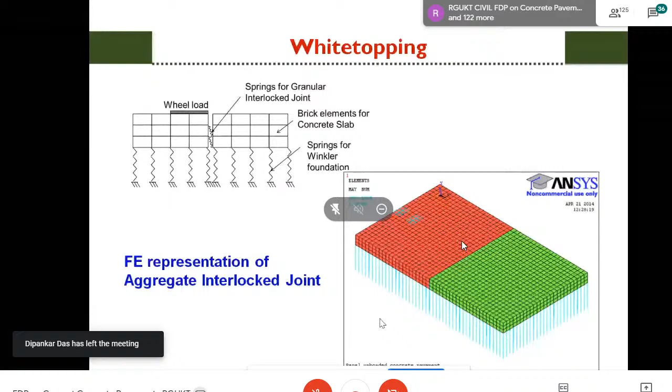We have done some small analysis and the work is going on. This is a 2-panel pavement with aggregate interlock joint, and finite element analysis was done on a 1.75 by 2 meter pavement. This pavement has already been constructed in Nagpur, and that analysis was done by us.

We also did finite element analysis and checked the stresses at different locations. A, B, C, D are different locations of the pavement and of the wheel load on the pavement. We found the stresses, and based on that, the design was suggested.

We also checked stresses with different joint spacing, and found that when we increase the joint spacing, the flexural stress actually increases. We compared this flexural stress with JPCP stresses and it was quite less. Because of the smaller panel sizes, the temperature stress is much less, so the total combined stress is also less.

That is why white topping is becoming popular nowadays, because the joint spacing is less and no dowel bar is required. But if you go on increasing the joint spacing, the stresses also increase.

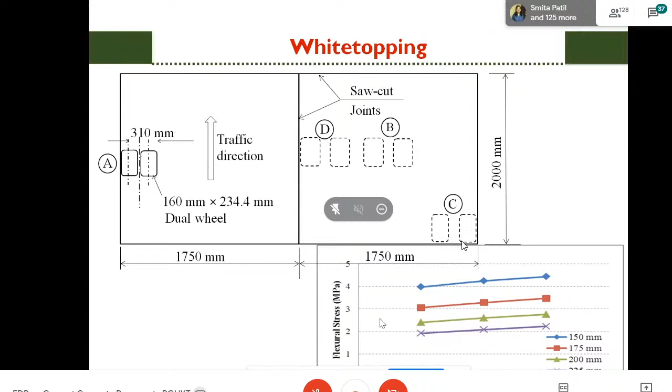So this was a small work done for that Nagpur road. This is coming particularly for moderate to low traffic areas, and it is a very good option for urban roads. In urban roads we do not have so many commercial vehicles, but it is a very good option and provides a very good service life and smooth riding in urban areas.

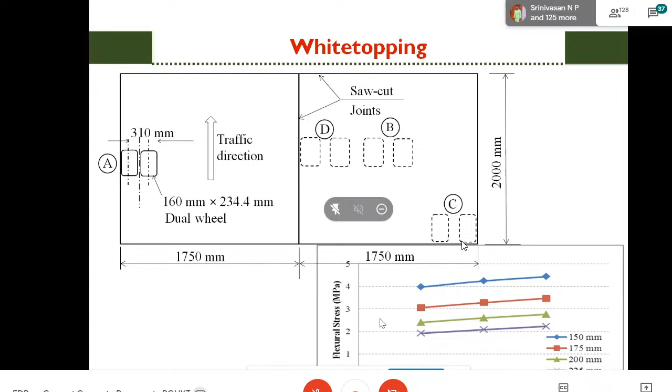More work is now going on, and we will tell more when we do those things. So that's all for today. I am closing here, and I will be happy to answer some of the questions if you have.

Thank you, madam, for your elaborate presentation on various aspects related to rigid pavement. I'll go through the chat box, madam, you also can go through it for questions. Yes, yes. The questions are there in the chat box. Okay, or we can interact, otherwise I'll read the questions, madam, you can answer, no problem. Okay, okay.

Let me tell a few words on whitetopping. The first question is on whitetopping — I think you will have another presentation by Dr. Ramachandra on whitetopping, yes. But anyway, I can tell you: in whitetopping, it is actually a concrete overlay over an existing bituminous pavement, and since the joint spacing is less, we found that the stress developed is also less in case of whitetopping. As I said, it is for moderate traffic volume roads.